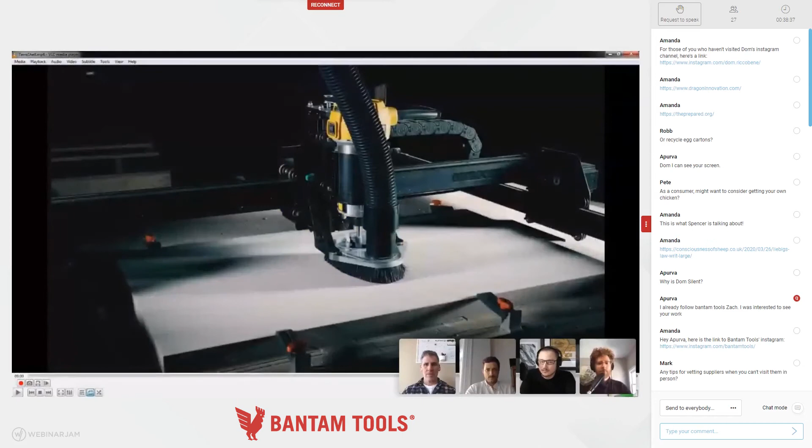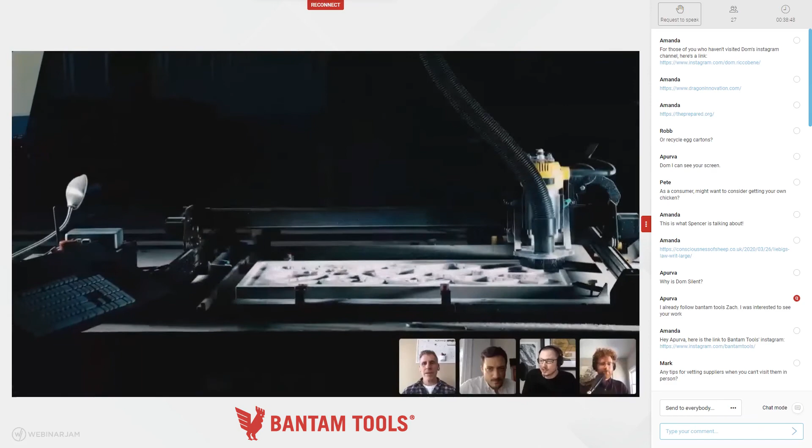So what you're seeing me make here, this is what I do at work, is a horse and carriage version of a new concrete forming technology we've developed, specifically to be manufactured with robots and automation. It's a brand new low impact paving system.

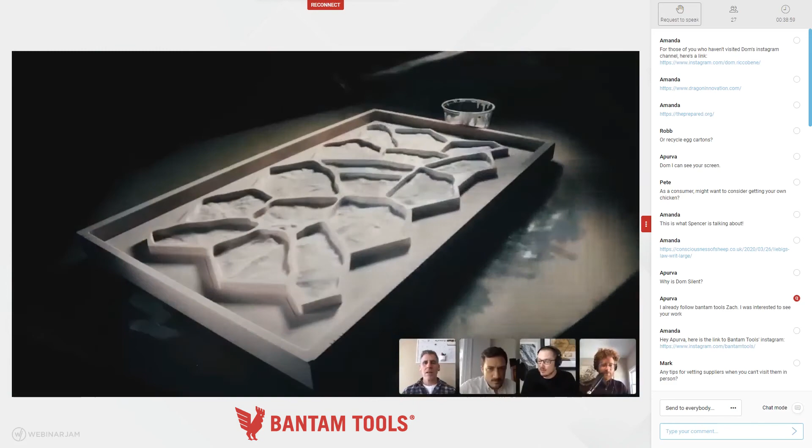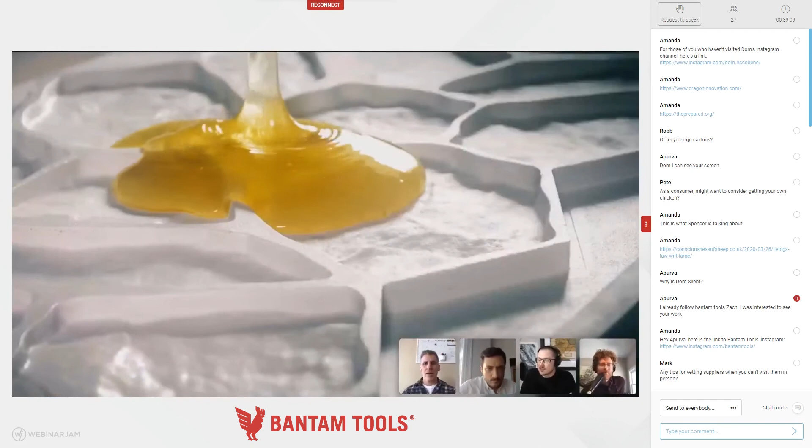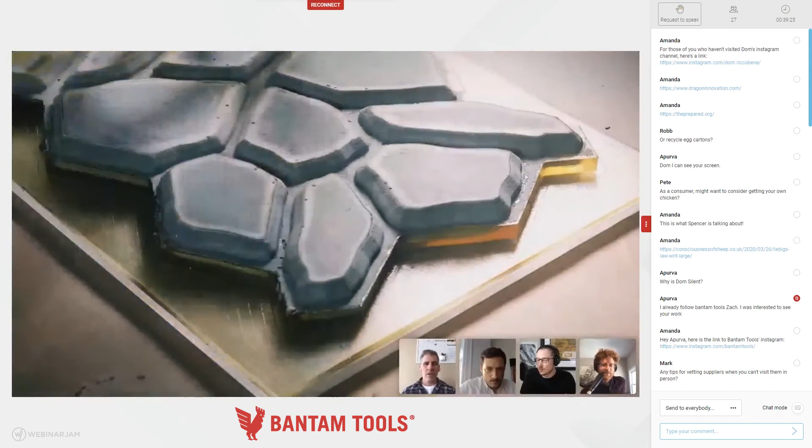If you've ever used mosaic tile mats for your kitchen or bathroom, it's the same idea but for your yard, made out of concrete. This specific design uses biomimetic geometry to hide the seams, and it's permeable so rainwater can make its way back to the water table. Each mat uses half the raw materials per square foot as a traditional paver, making it one of the more sustainable concrete products available.

You can lay it on uneven ground or even a flat slab and it'll work fine. You can seed it like I do here and grow grass or native plants through it, whatever you like.

That's available at Lowe's right now on the West Coast and in the Southwest, but I'm not going to encourage anybody to go out shopping right now because I don't think that would be the right thing to do. So put it on your list for when the dust settles, whenever that happens.

Other questions I get are about my topographic modeling process. I get that question a lot, and I've been putting it off for a while because I wanted to make a clear tutorial, but I'll do a quick primer about how you can easily do it, and also a more complicated way to do it.

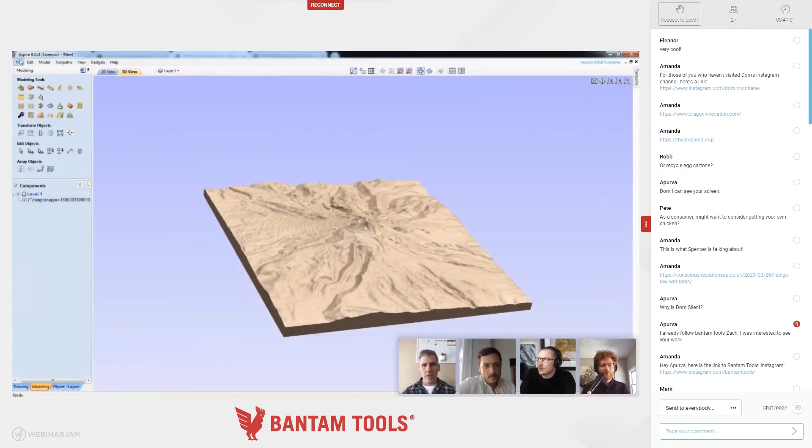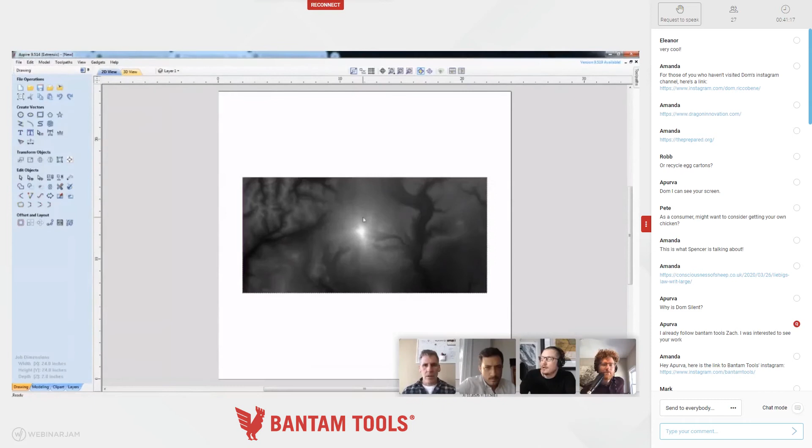Now I'll open Aspire, which is one of the pieces of CAM software that I use. Sorry about that. So what we'll do is import that bitmap. There's our Mount Adams. Scale it up.

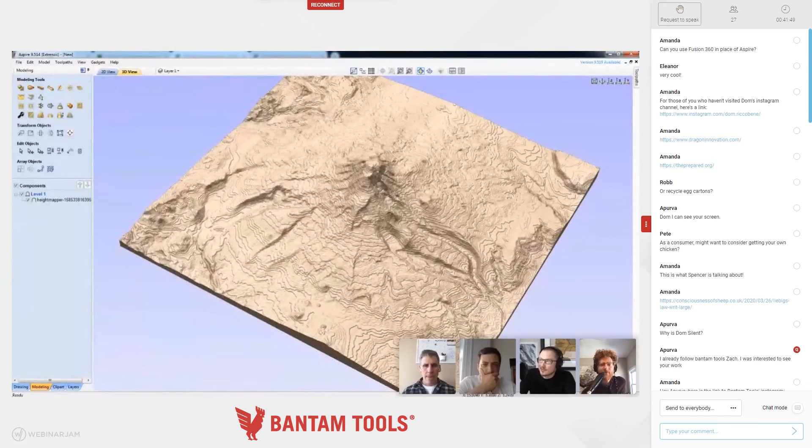Then we'll convert it, create a component from that bitmap. And there it is, but you can see that the elevation definitely isn't translating. You can change the scale, and that's around what it looks like, but you'll see this banding, because PNGs are compressed, so it's not very high resolution, that image we used — but you can smooth it.

And so that's a decent model, and there you go. In like 2 minutes I've got a model that I can machine. But for my actual process, which a lot of people have been wondering about, and finally I'll share it with you today, I download the data straight from USGS.

This is viewer.nationalmap.gov, and they have a few interfaces for these data sets, but this is my favorite because you can show the availability of the different resolutions. So that's 1 arc second.

1 meter resolution is pretty spotty, and that's collected by LiDAR, but I always like to use 1 meter when I can. The US is covered at 1/3 arc second everywhere, so when in doubt you can go to that, but I like to use 1 meter.

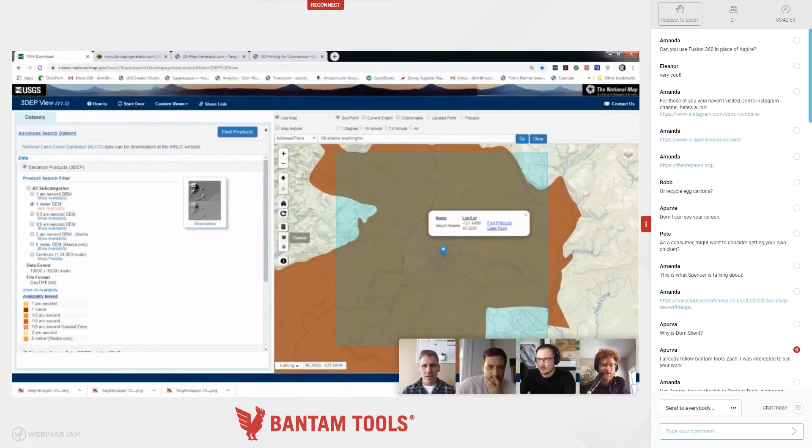We'll go to Mount Adams here. Let's see — here's Mount Adams. You can draw a square or a box, then go to find products. It takes a minute to propagate, but here it is, and you can see it's separated into tiles.

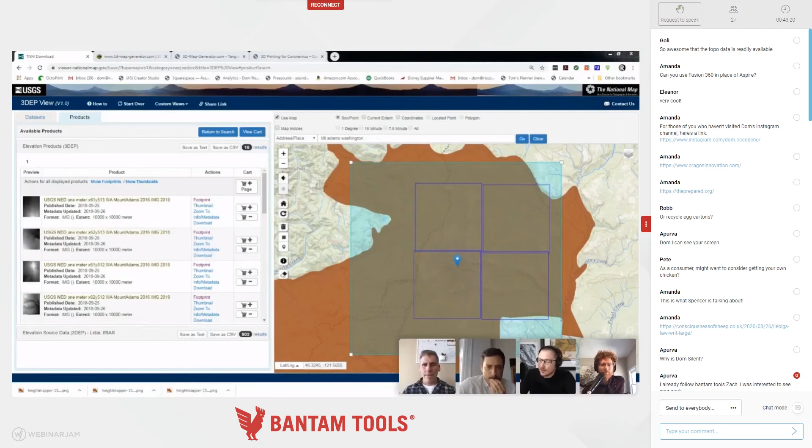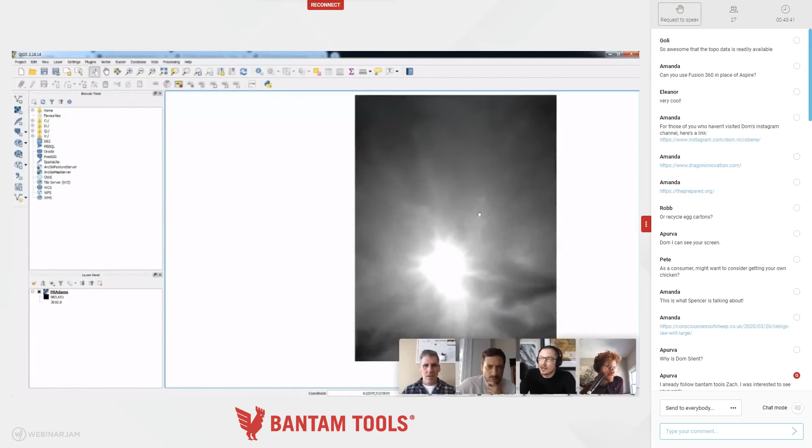So what I do is download these tiles, which are raster files, really high resolution image files. Then I open QGIS, which is open source GIS software, go to raster, miscellaneous, merge, and merge those tiles together, stitching them into one. Then I export that raster, using conversion translate, into an ASCII file — and I'll show you what that file looks like.

And this is the data set, the way it looks in text. What it does is define the number of columns, the number of rows, cell size. And this is pretty much every point in that model represented as an elevation, just like in an image every pixel is represented by a color.

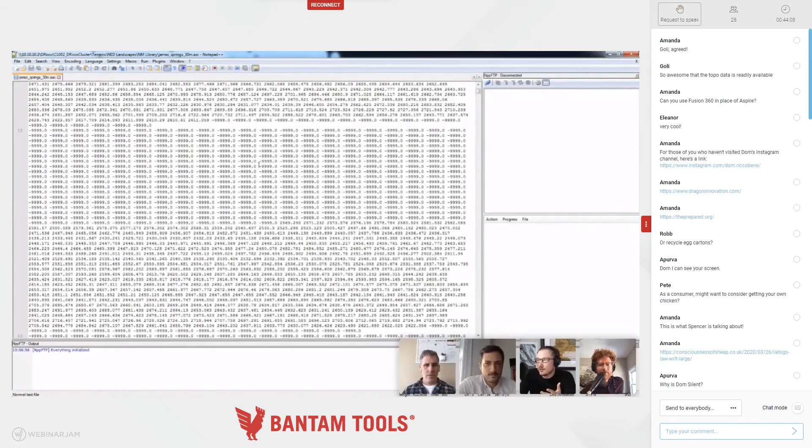In this file, every point is represented by an elevation. So what I do now is use Cinema 4D, and I just want to point out that this can be done in Blender using an add-on called Blender GIS, so you can do that identically for free in Blender. I just wanted to point that out. But I use Cinema 4D because I'm also an animator, and it's easy to integrate into my process.

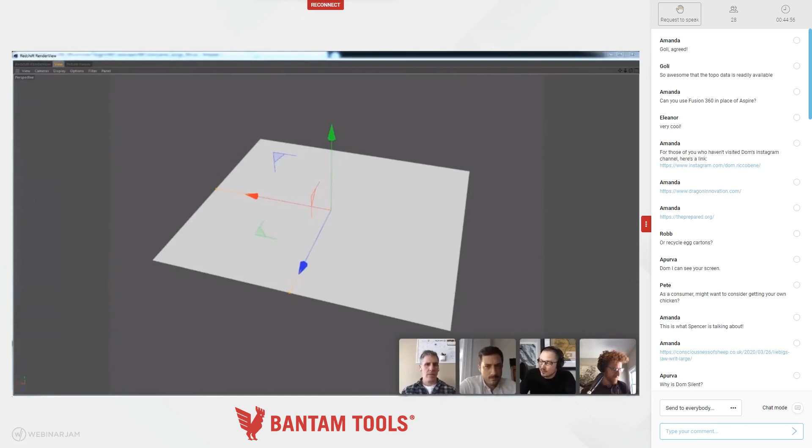So what I do now is embed that ASC file that I exported from QGIS, Mount Adams, and it'll take a second to load. This is a 2 GB data set, so it's pretty big, but I've gone up to about 10 gigabytes. At that point, things start getting a little bit slow and unnecessary for what I'm doing, but it'll load in a moment here.

And here's our data set represented as a 3D model. It's a little bit low resolution because the subdivisions are down right now, but the next step is to crop it, drag it around. Then once I'm happy with that, I'll up the subdivisions. Let's just take it to the max here. It'll take a second.

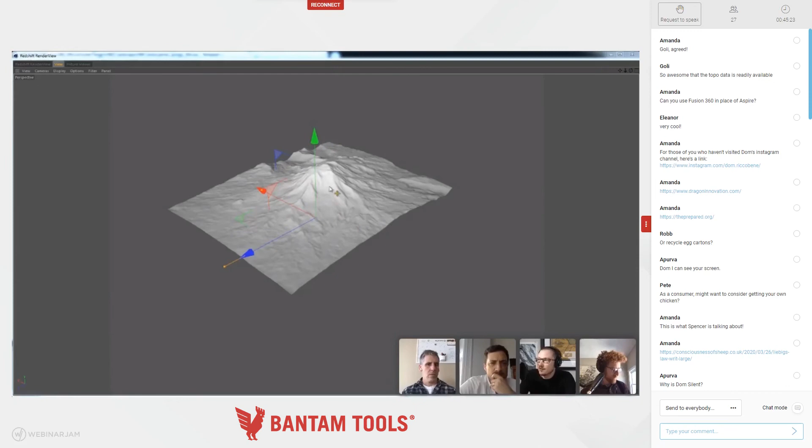Now you can see how high resolution these 1 meter data sets are. I like to use the highest resolution data sets, even though I need to use like a needlepoint to get every detail onto a model. The reason why I use high resolution is because of these sharp peaks here.

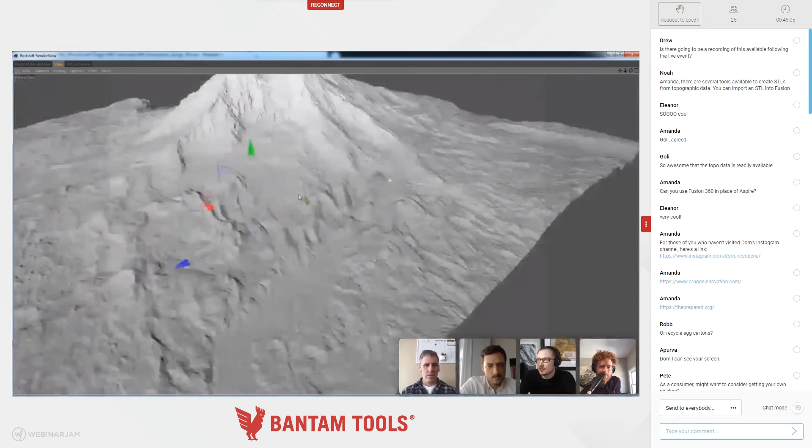When this data is being collected, it's collected by points, and each point is an elevation value. On the lower resolution data, there might be a point here, a point here, a point here, and then a point here, and it might miss this sharp peak. So in that model, that sharp peak is going to be rounded, and the whole thing is just going to look a little bit blurry. So I like to go way overboard in the data that I put into the CAM software so I can get those small details. That's basically the process.

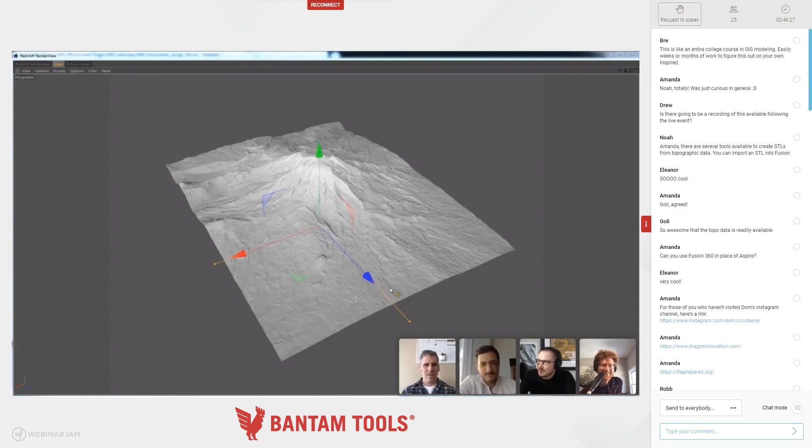I export this and put it into Aspire just like before. But I'll go over a fun project I'm working on, a chocolate bar. I'm calling it the Cascadian chocolate bar. What I did here is I imported 4 different data sets, Mount St. Helens, Mount Rainier, Mount Adams, and Mount Hood. These are actually all 4 of them at their actual size, so you can see the comparison of the size of those peaks.

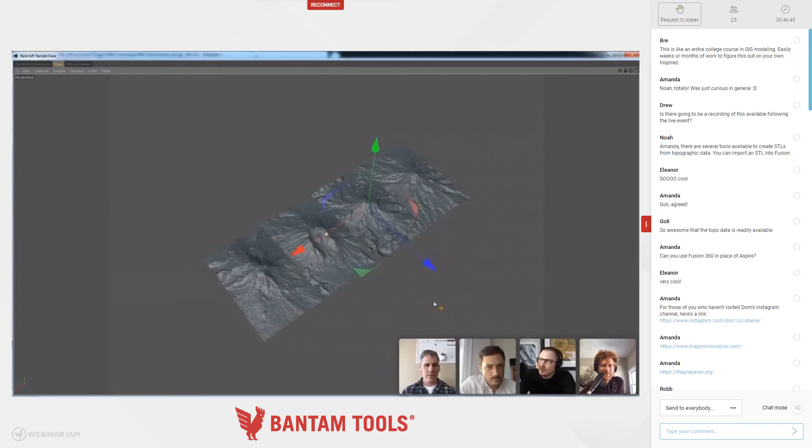Then what I did was combine those up to the right dimensions of the chocolate bar that I want to create. They're not to scale, but proportionally to each other, they are. So then I export that into Aspire that I'll be using for this project.

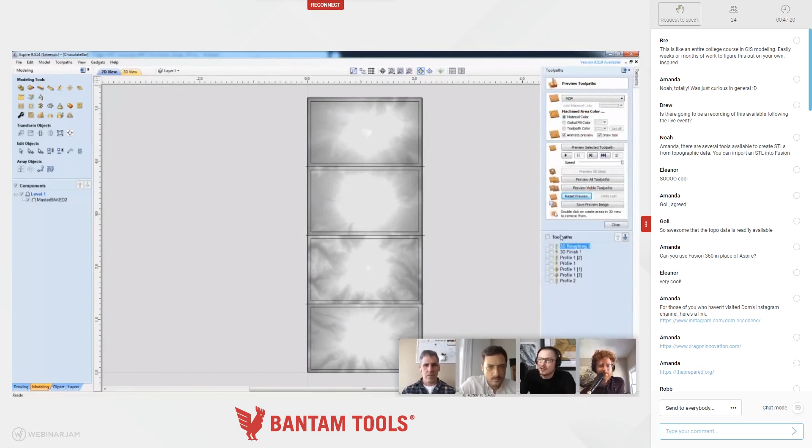What I'm doing here is I'm actually modeling the chocolate bar with the tool paths, which is not the way to do it normally. But since I want to work with this high resolution data, Aspire is just going to spit it right back at me. So since I'm kind of aware of my tool geometries and my depths, I think I can pull it off here. So I'll do a preview of how I'm going to go about it on the machine.

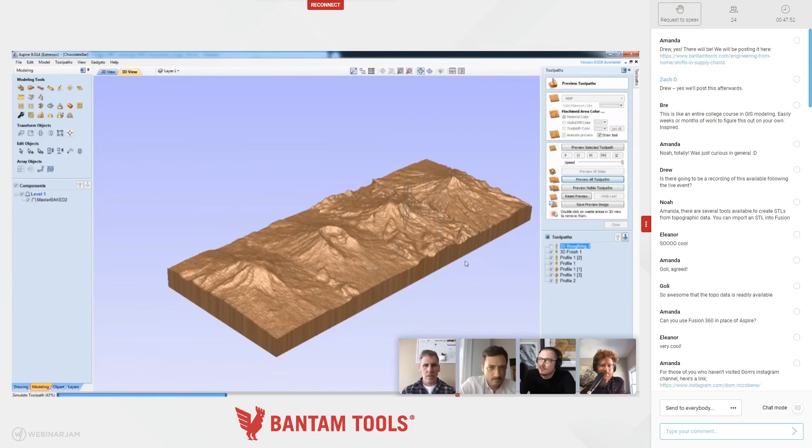Rough it out. This is kind of a new process that I like because of how the time lapse looks, but there's a lot more efficient ways to do this. Then I'm going to use a really fine end mill, like 0.02, to do the detail here, the finishing pass. This will take probably 3 hours or so.

And then I'm going to go in with some V-bits to sculpt the rest of the chocolate bar. So there's the Cascadian chocolate bar.

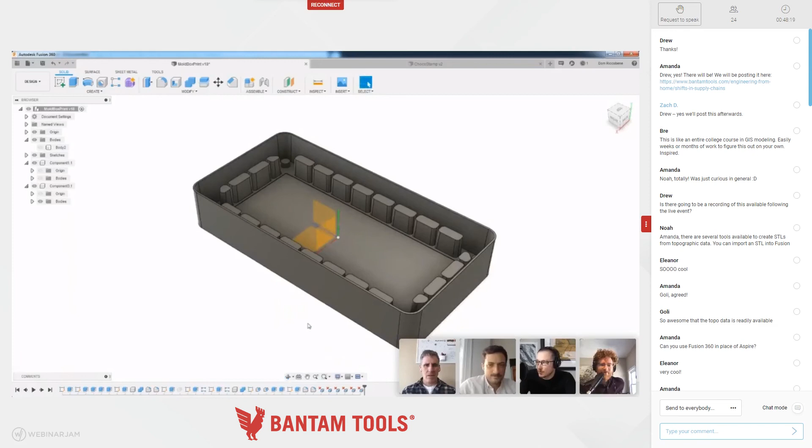And then the next step is to make a mold for this so I can create the mold. So in Fusion 360, I designed a mold box that's going to be 3D printed. I'll kind of play through the process of that. So I build a box around a theoretical model that I made in Aspire. Then what I'm doing here is making a grid, and these have a few different functions, and I'll show you that in a second.

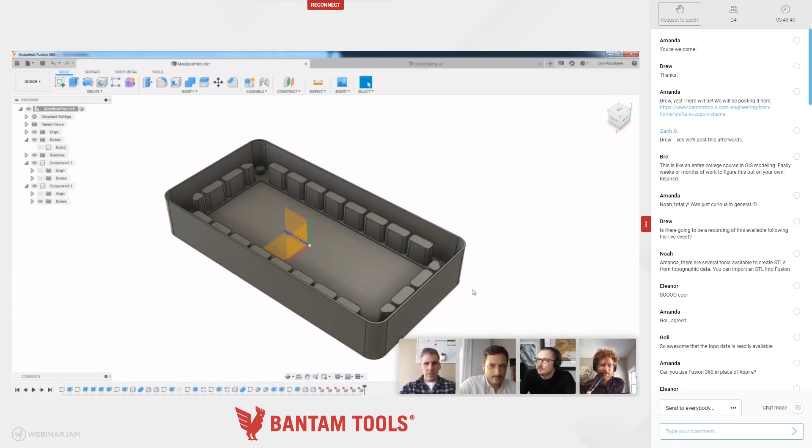And so here's the 3D printed part. So what we can do is, sure, I'll save it, so derive this into a new file. And we can simulate what this will look like by doing this. We'll make a sketch on that top lip.

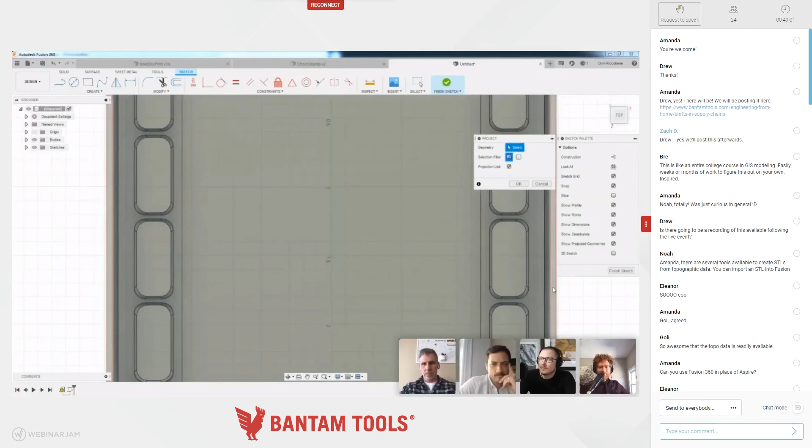Project it. And then we'll extrude this down as a new body. So we've effectively filled this mold with silicone.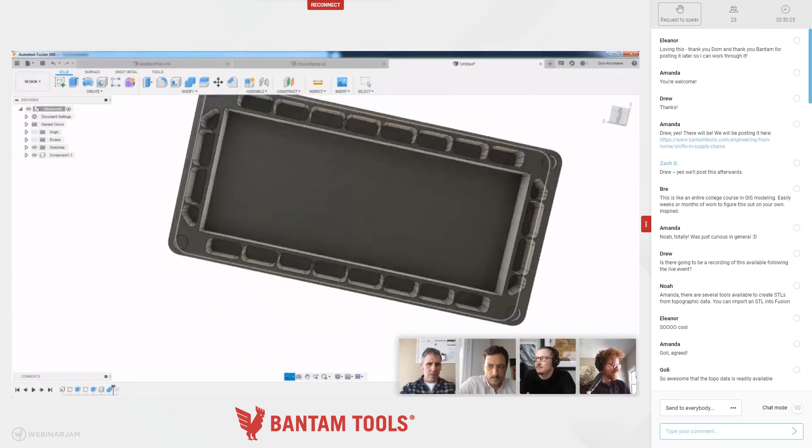And then what we do is we combine, and this is how we design our concrete molds as well. We do the target body as the material we pour into the mold, the tool body is the mold. We cut it, make a new component. And so here's the mold that will produce, and this would be the topography when I actually make it.

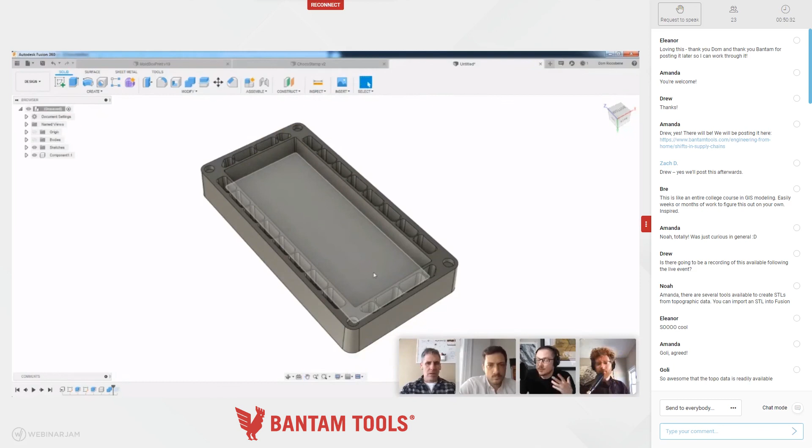And so this grid does two things. One is to save material. When we're making our concrete molds, pouring 60 20-pound molds a day, just something as simple as this can save 20% in the rubber use of those molds, and that can add up to thousands of dollars a day. So we like to conserve our material as much as we can.

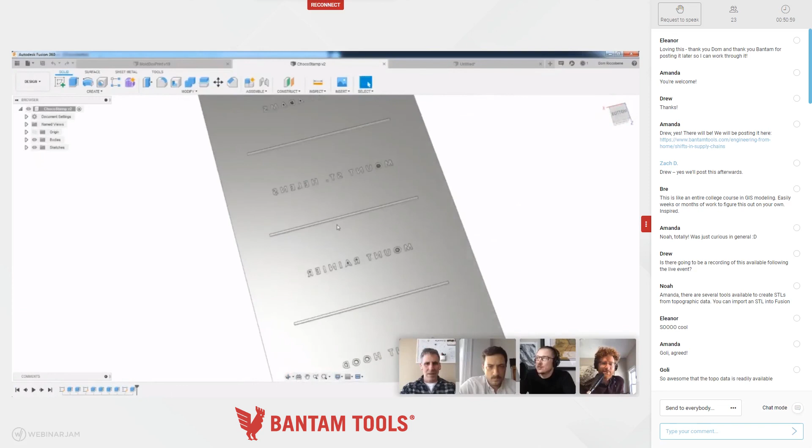So this is going to reduce the weight by 20%, and also it creates a spillover place where the chocolate that I pour into this mold can spill over and not create a chunk hanging on the side that I'll have to break off. And these pins here are for a stamp for the back that I'll definitely machine on the Bantam machine. And this will stamp the names of the mountains on the back so you know which mountain you're eating.

That's my next project coming up. I'm pretty excited about that. I'm not quite sure when I'll be able to do that because, well, everybody's lives are turned upside down at the moment, but I'll be kind of picking away at it in the next few weeks, definitely.

That's so awesome. Thank you. Someone was dropping in the chat saying this is like an entire college course in ArcGIS. That software is crazy. I remember in the podcast you were describing how it's basically the same software that FedEx would use to plan shipping routes and avoid climbs. It's wild that you use such big data sets for these.

Do you have a small topo that you could put in front of the camera so people can see? Yeah, I'll grab one real quick. Okay.

For people who are listening in, we had Dom on the Prepared podcast, the Edge podcast, and he walked us through the whole process of how he uses all of these different pieces of software to create these really beautiful high resolution maps.

So let's see if my camera wants to autofocus on this. This is, I have to cover my face, I think. My camera's like 4 feet away from me. Okay. I had to use my DSLR. That's not working. There we go. A little bit.